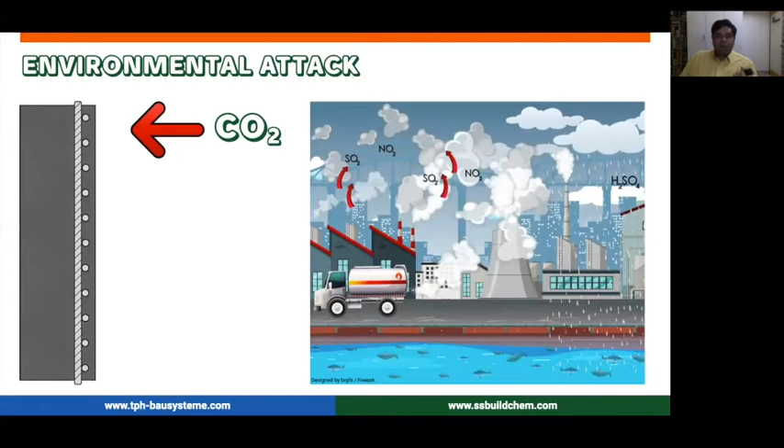So why does this happen? The chief cause of corrosion or deterioration basically comes from environmental attack. A lot of people talk about how the Taj Mahal was built so many years ago, or the Pantheon in Rome thousands of years ago, and they still stand - so why not new buildings? I'd say that since the industrial age, pollution has gone up drastically - carbon dioxide, carbon monoxide, water, SOx, NOx, so many gases from industries and vehicular pollution.

So all this pollution is directly trying to attack any new structure that we build. Yes, those older structures lasted a very long time, from when they were built to now. But now, as the industrial age progresses, there are problems relating to the durability of these structures as well.

Now, in a nutshell, if we think about what causes the deterioration, we'd find it easily. This is your concrete, and these are the capillaries or ingress paths for a lot of materials. It is basically carbon dioxide, chlorides, and water that will primarily cause the deterioration of your RCC structure as a whole.

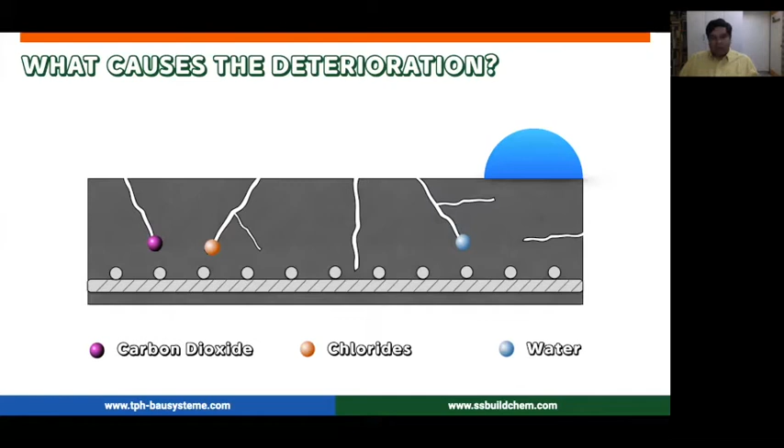These materials get access to your reinforcement through the cover. In case your cover is damaged or not functioning properly, these things go down. What they essentially do is change the pH of your concrete - it goes from a very alkaline pH to almost an acidic pH. That's basically what starts off the problems of deterioration in concrete.

Of course, I'm not going much into the depths of this - a lot of you are already experts in the line of waterproofing, as well as many consultants joining us today who also know and work a lot in this field. So I'm not going into the nitty gritty science of these things.

If you look at it in a very simplistic manner, the key to preventing corrosion is simply to isolate your reinforcement. Either by improvement of the cover region, or by repairing, rehabilitating, or providing protection to the concrete in the cover zone, we need to isolate the reinforcement from chloride, from other gases like carbon dioxide, SOx, NOx, and water. Once these three elements are kept away from your reinforcement, the process of corrosion simply stops.

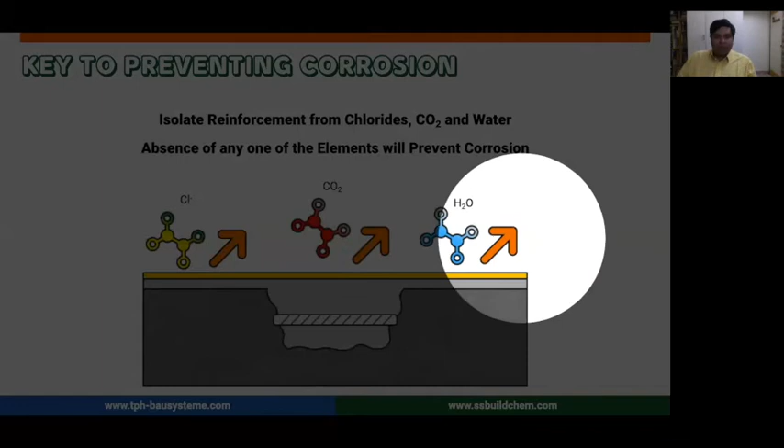So that means even if you're thinking about protective coatings, if you do it right at the beginning of the life of the structure, we can actually see that it increases the life of the structure quite tremendously and increases the durability for the times to come.

If you put a very simplistic view on the causes of RCC deterioration, you can see that they can happen either before, during construction, or after construction. So before or during construction, it may be due to design errors, like joint spacings not calculated, or load calculations not done properly.

But this rarely happens. More so, the causes of deterioration originate in mix design errors or poor workmanship - things like poor aggregate grading, using very high water cement ratios. We talked a lot about that in a waterproofing webinar as well.

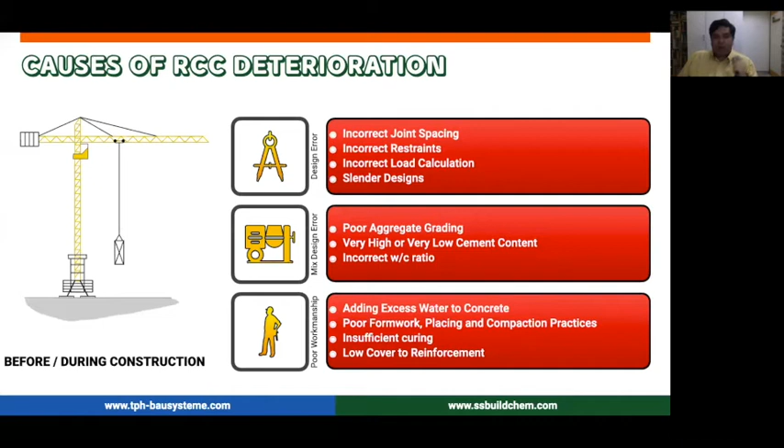And the second part comes, and this is where it needs much more improvement - that would be poor workmanship. That means adding excess water to concrete, not compacting it properly, not curing it properly, not working properly on the reinforcement zones or cover zones. That is where the problem of deterioration actually begins.

And also, if you have done all the first part correctly, then comes the problem about in-service issues - problems like static or dynamic overloading. That means there is a mechanical stress on your structure, overloading, lot more dead weights, maybe something like a collision, explosion, things like that.

Thermal variations are the primary way of causing cracks, and cracks are both the beginning as well as indication of a deterioration process. So everything starts off from a crack.

Then there might also be excess chemical loads onto your structure, which can be gases like COx, NOx, it can be water, then acid, salt, alkalis - especially underground structures are exposed to a wide variety of these kinds of aggressive chemical materials.

And also, last but not least, are biological factors that cause deterioration. Simple things like growth of fungus on your concrete, plants in your structure - they are both indications as well as causes of the structure starting to go bad.

So what can you do in cases like this? Once you say okay, we have started to have a problem, the first thing that you can do in the repair - even when you're evaluating a structure - the first step is do nothing. There might be something that you can do, you cannot do, but that is one option that you have, that you do nothing.

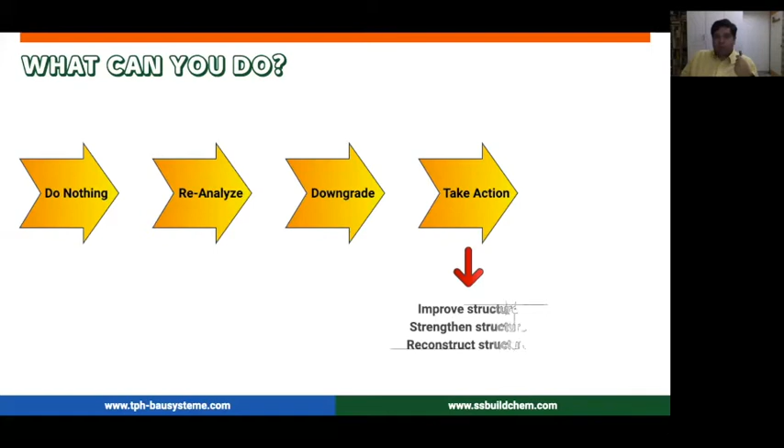Then the next part comes, which is important. So you have decided that something you can do is take some action. Some action means you can either improve the structure - that's where your repair and rehabilitation comes through - or strengthen the structure, that's where your retrofitting comes through, I would say. And the third option is you can reconstruct parts of the structure, or repurpose parts of the structure.

And the last, if there is no option available, maybe it's not financially viable to take up this particular point, then you have to think about demolishing the structure as a whole.

So in most cases, the logical step of action would be that concrete needs to be repaired. And here we have to understand both what is causing it, and the materials are key. So anytime you are taking up a rehabilitation or repair project, you have to take care of three things simultaneously - it's not one or the other, it has to be taken simultaneously.

Things like concrete condition - what are the defects, damage, what's causing it, the deterioration part of it. Then what are the aspects of the structure itself - what is the end use going to be? What are you planning to do with it after your repairs and rehabilitation? Are there any constraints to using it?

Everything relating to the structure is the second part, and the last part is the repair program. That includes what methods you require, what repair action plan you follow, what specification you follow, and what kind of planning and materials are involved. Once you bring in all these points, that constitutes your repair program in general.

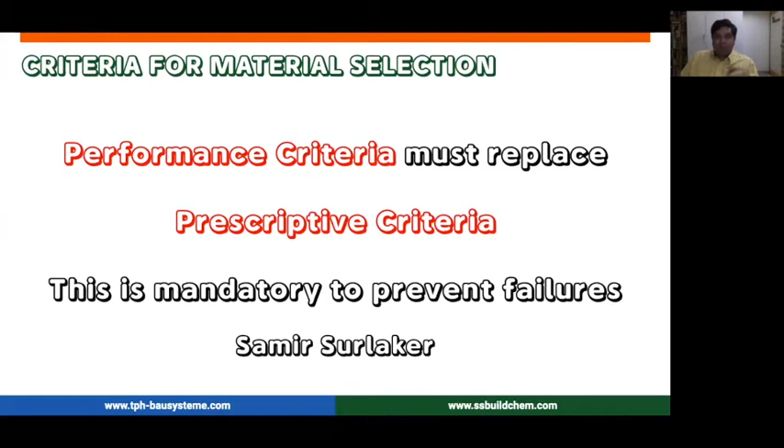That might be one method, but I don't think that's the right approach for each and every step of repair. Somewhere the performance criteria has to start getting into this. This is another area where our consultant friends really have to come together to guide and drive the repair process - in terms of diagnosis and testing.

Many of you are in the field of executing repairs, and others are consultants working in specifying and designing the repair system. To both parties, I'd say anytime a repair system comes to you, the first and most important part is diagnosis, and this diagnosis can only come through proper testing.

It's like going to a doctor. You go to a doctor, and the first thing he asks you to do is get some tests, and based on those tests he makes a diagnosis.

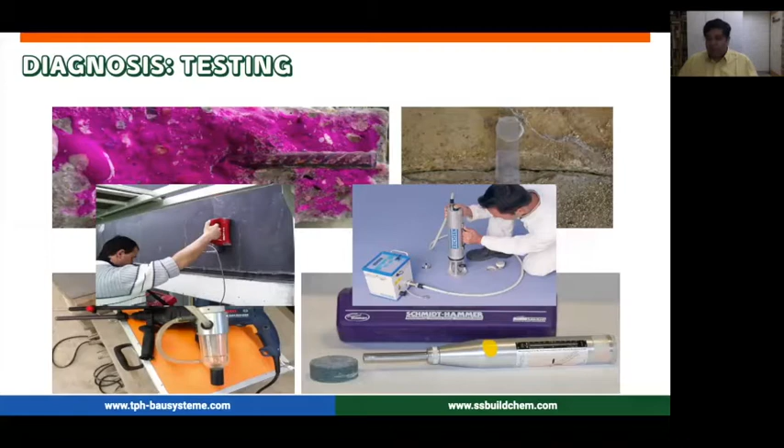So even basic things like a phenolphthalein test, crack movement monitoring, or a pull-off test for strength. The one on the left corner is for getting small samples to test the chloride profile and chemical makeup of the concrete. Then you have non-destructive testing based on impact echo, or UPV, and a Schmidt's hammer that tells you whether the surface is good or not. This kind of testing is very important in the whole diagnosis process.

Another important step in testing is observing reinforcement corrosion - this tells you a lot about whether your problem is structural or non-structural. For example, many times if you see generalized corrosion in your steel, most probably it is because of carbonation, and you'll generally see rusting around all sides of the reinforcement.

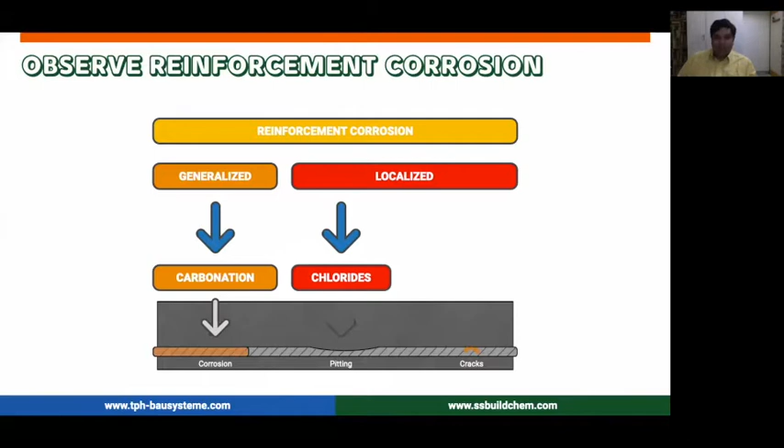If it is localized corrosion, that's much more dangerous, because it might be due to chlorides, which cause severe pitting and loss in the rebar section. It can also occur if a concrete structure is constantly under stress or creep - in that case you sometimes get stress corrosion in the steel, and begin to see small cracks in the reinforcement. So this kind of observation tells you a lot about what's actually happening to your structure.

You have to take a look and establish the cause of damage, whether it is structural or non-structural in nature. If it is structural, that means it is related to excess loads - maybe chemical loading, mechanical loading, or thermal loading. Non-structural simply means it is due to durability-based aspects.

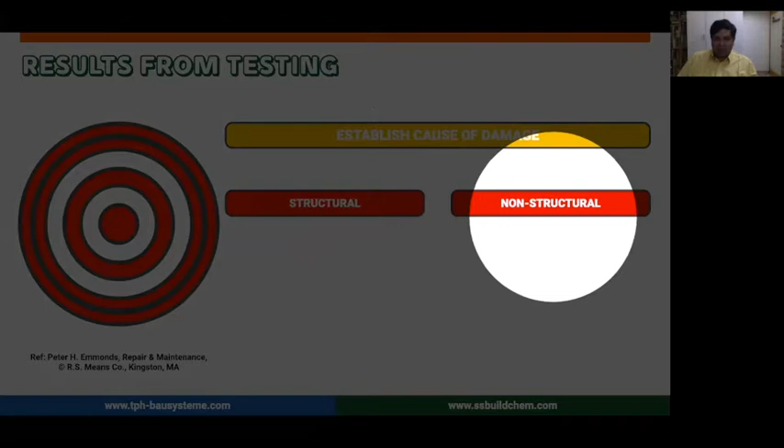The non-structural causes are much easier to repair, because in most cases you just do a basic repair as well as put a protective coat on top of it that will solve your problem.

Structural ones are slightly more tricky, because you need a structural engineer to actually understand the load redistribution across your structure, and then he can tell you where, in which elements, what kind of repair is to be done—whether jacketing is needed, whether an injection system would do, whether concrete replacement will do, or whether you need CFRP for retrofitting and so on.

So basically it is the cause that will determine the methodology of your repairs. Although the principles of repair are pretty finite—almost common for both structural and non-structural—and the kind of methods and materials you would use also remain more or less common, that is not the problem. Finding and treating the cause is the most important part, the most important way of repairing a structure for proper durability.

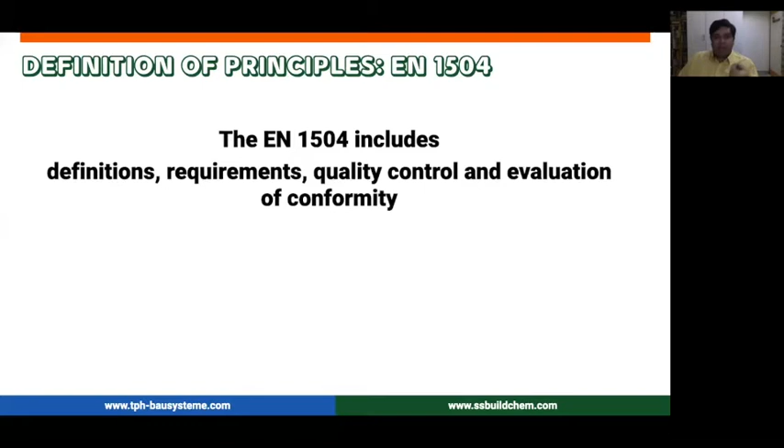So that is where one of these codes come in. This particular code is EN 1504. This is one of, I would say, the world's first proper coded provisions, and it includes a definition, requirements, quality control, and evaluation of conformity for repair systems. Basically, it regulates the products and systems for the protection and repair of any types of RCC structures.

This standard talks much less about what type of structure you're going for, but talks about concrete or RCC as a whole, and gives you certain principles to repair those particular RCC structures. So the information is very useful as a summary manual for planners, applicators, manufacturers, official bodies, test institutes, and so on—it's kind of a good specification guide for them.

When we talk about the principles of repair, EN 1504 actually breaks it into two broad areas. The first one is concrete defect remediation, meaning these six principles are targeted only to remedy concrete defects.

So basically, to repair this, you can look at protecting the concrete structure against ingress of substances and ingress of moisture. Then the third principle is concrete replacement or restoration. Then there is structural strengthening, then improving the physical resistance to damage, and improving the chemical resistance to damage.

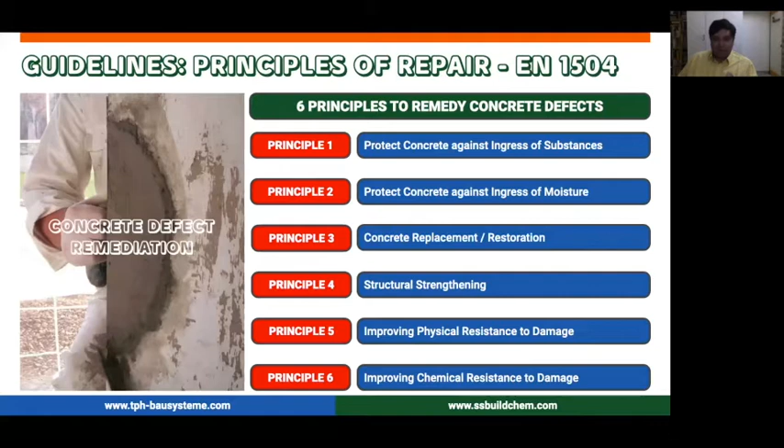If you actually see the methodologies involved, they are more or less similar to what we already do for repair—it can be something as simple as putting impregnation or protective coatings on top, applying mortar by hand, recasting with concrete, recasting with micro concrete, or replacing the element.

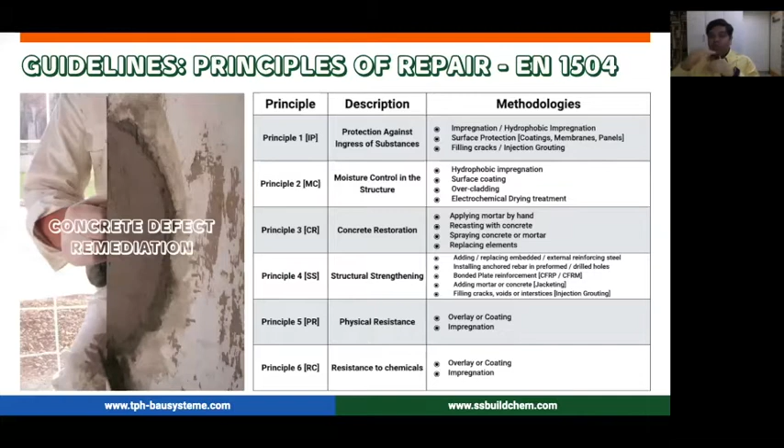Then under structural strengthening, you have CFRP, CFRM, installing anchor bars, adding or replacing reinforcing steel, and most importantly, filling cracks and voids through injection grouting. All these things we already kind of use for repair strategies, and what EN 1504 does is simply formalize the relation—under what condition you will use what kind of methodology.

The second part that EN 1504 gets into is preventing reinforcement corrosion. Here there are five different principles. The first one is restoring the passivity of the reinforcement. The first two principles, seven and eight, are based more on just providing protective coatings.

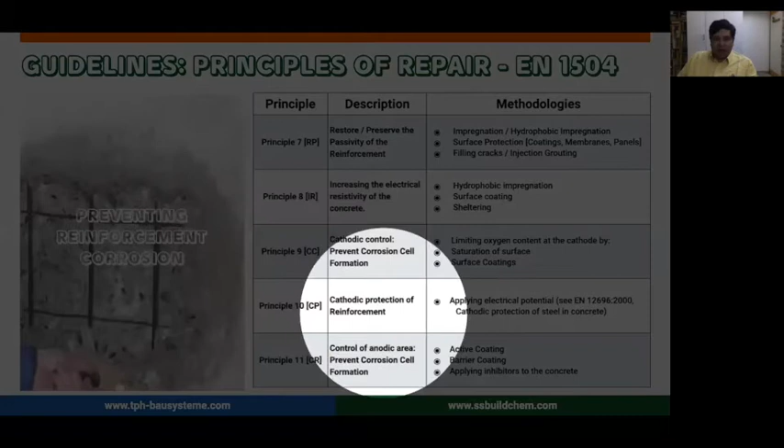Even cathodic control is pretty much similar. Principle 10, cathodic protection, is much more about application of electrochemical methods like electrochemical extraction, salt removal, and applying electric potential. Then controlling anodic areas is again done by coating the reinforcement itself—active coatings or barrier coatings for reinforcement—or using corrosion inhibitors in concrete.

So you would actually see that the materials and techniques we use have been around for quite some time—it's only that there has to be a formal way to decide what to do when. That is why we say repair is an art if you know the science behind it. The materials remain the same, the methodologies remain the same, but the art form comes in judging what methodology will remedy what kind of cause, and what kind of effect it's going to have in the future.

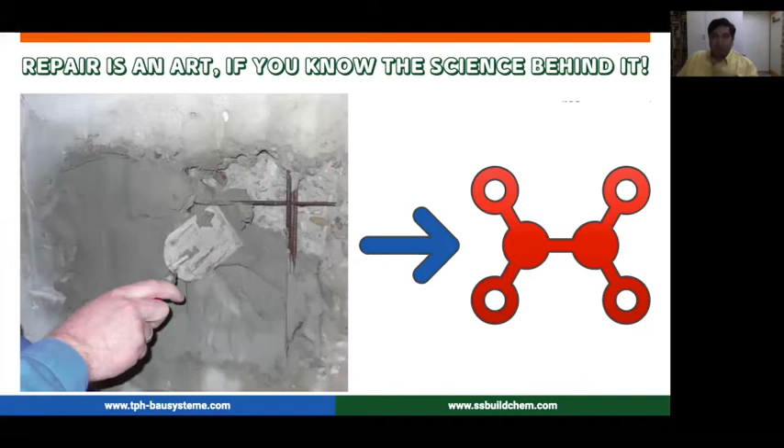So the general sequence of repair remains more or less the same. You start off with the first step, that is diagnosis—you basically figure out what the problem actually is.

So following that, you get to surface preparation so that your substrate can receive the repair materials pretty well. You have your corrosion removal, followed by your corrosion protection. Then you have application of your bond coats.

Replacing your concrete, basically a concrete replacement system. This might be your mortars or micro concretes or whatever things along those lines. Then you have a concrete cosmetic fairing coat, just to give an even surface for your protective coating systems.

And last but not least, once the repair is done, you have to protect your structure, because if you do all the very difficult steps of repair and leave your structure unprotected, then your repair cycle is just going to repeat, maybe within the coming year. So a failure of repairs becomes a big problem, and it can only be remedied by protecting our structure properly.

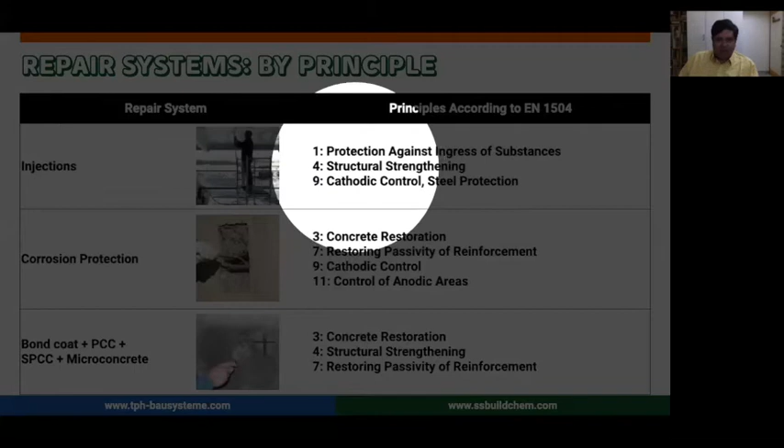So now again, if you take all those different steps that we just saw, what it would be coming into is mostly our injection systems, which can protect against both ingress of substances as well as structural strengthening. Then after the surface preparation comes your corrosion protection systems, which also meets a lot of principles according to EN 1504.

Then comes your step on bond coat, PCC, that's spray polymer modified mortars, micro concretes, and so on. And followed last but not least by impregnations and coating. We'll also talk very briefly about strengthening methods, that is CFRP and FRCM.

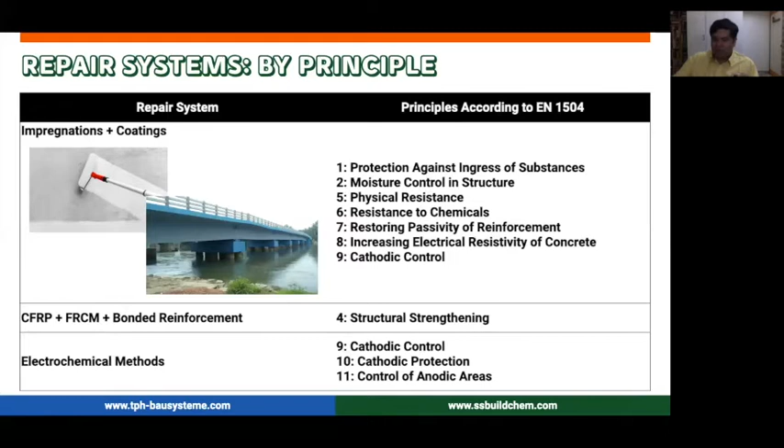These are some new technologies; CFRP has been used for quite some time. FRCM is a technology that is coming up for different kinds of structures. We'll just take a quick look into that as well.

So if we start off with the first part, once we see that there's a problem, the crack basically forms the beginning of the problem. So it's both an indication as well as a sign that something has gone wrong.

So now cracks, you can see many different types throughout your design. You can have longitudinal cracks, cracks due to frost damage, freeze-thaw, shear cracks, maybe incorrect joints done, or simple surface crazing due to shrinkage. There are a lot of things.

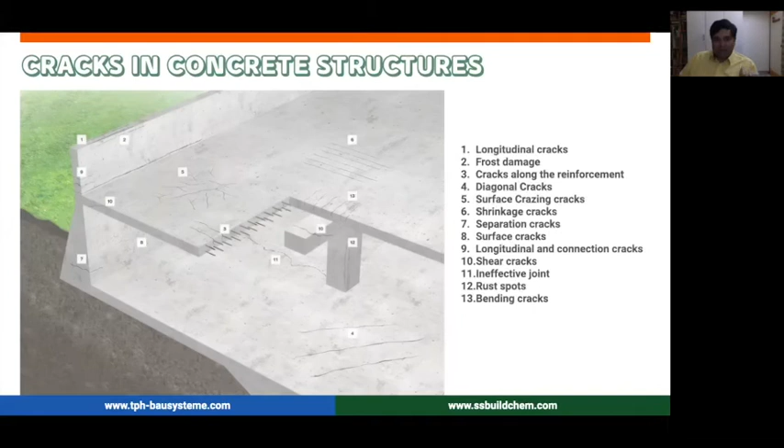So the thing about cracks is some of them can be structural in nature, and some of them can be related to the durability of the structure. So it is up to us to find out the cause, what is causing the cracks. Of course, they can be remedied by pretty much the same kind of injection materials.

So once we talk about the different material types, you have epoxies, you've got polyurethanes, you've got cements, you've got microfine cements. Then today you've got acrylic gels and also PUR foams. But if you see all the things on the right hand side of the diagram, that means the microfine cement suspension, cement slurry, polyurethanes, and epoxies.

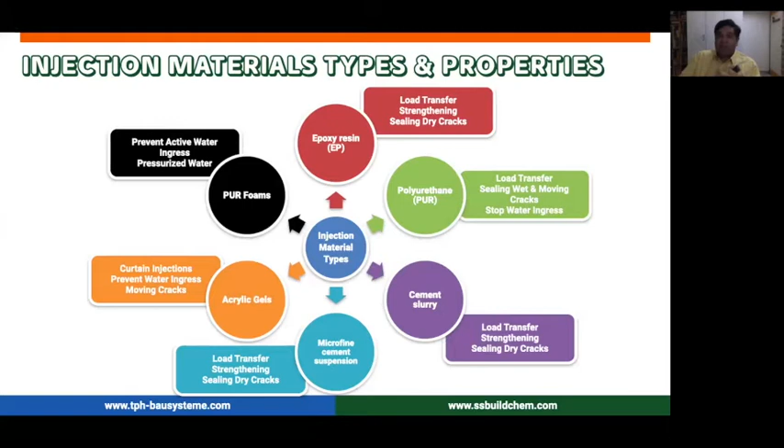And these are the ones that are normally tougher, meaning they have a very high tensile strength, a very high compressive strength, and extremely high bonding strength. So these are the ones that are mostly used in your repair methodologies, as opposed to the other two types of injection systems.

And the selection of the injection material depends pretty much on your crack width. For example, if your crack width is maybe 0 to about 0.1, 0.2, 0.3 mm, then the only thing that can go inside would be a low viscosity EP or a PU or an acrylic gel. In this kind of case, you can't go in with cement.

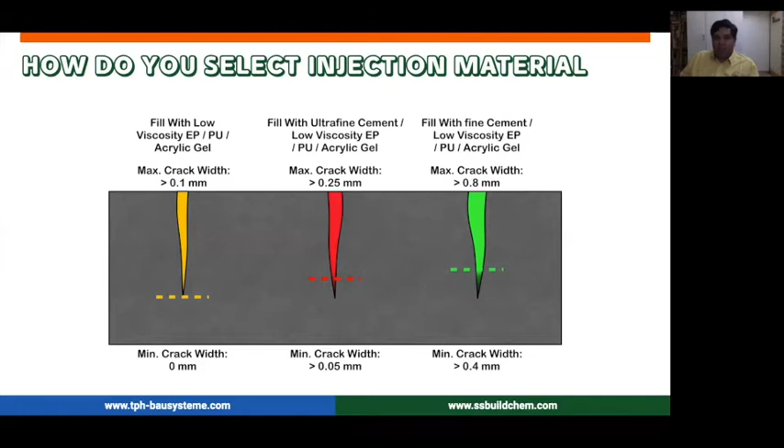If your crack widths are maybe somewhere around 0.25, then you can start thinking about ultrafine cements. But only if your crack widths are more than say 0.8, 0.9, in that case you can start looking at cement grouting as an option.

So now, the injection material selection is based on a variety of factors, like whether it's a surface crack or a deep crack. But when we talk about repair and rehabilitation, what we're looking to do is transfer loads, meaning you have your crack face and you want to transfer the load from one face of the crack to the other side. In that case, the best two options would be a hydraulic or cement injection system, or an epoxy injection system.

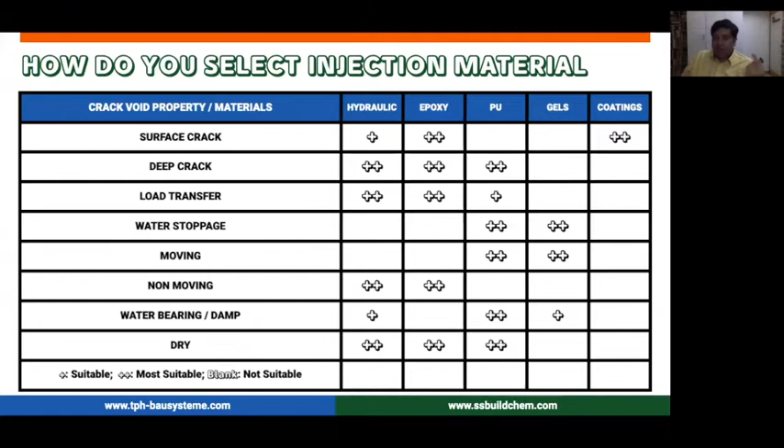There are today certain PUs also available with us, which we call structural PUs. They also reach compressive strengths of almost 70. So in case your voids are a little bit wet or damp, the basic epoxy or cement can't run. But if it's a bit wet, you can also use those kind of structural PUs to seal those kind of cracks.

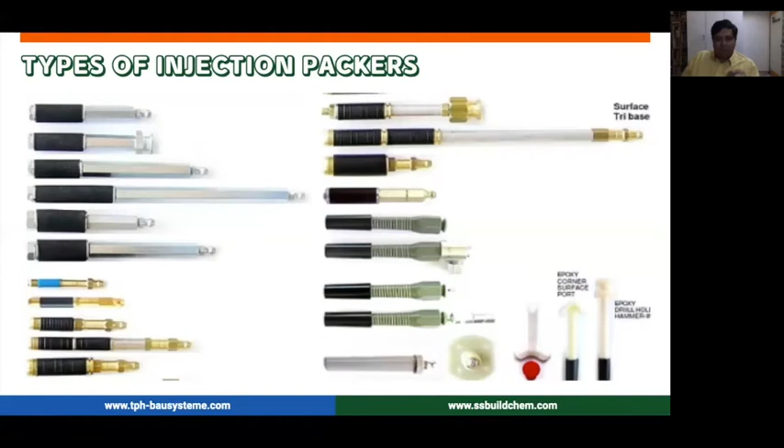Like if you're talking mostly crack remediation, then mostly we are using these kind of steel packers along with surface packers if the cracks are very close to the surface. But I would say talk more to us on how to select it.

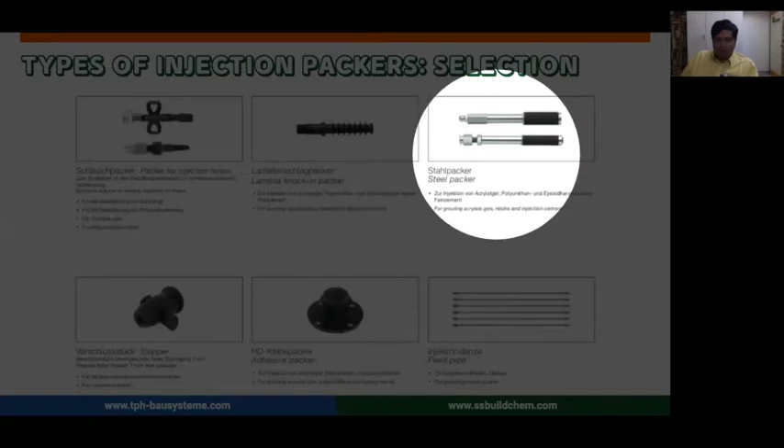For example, if you're looking only at cement injection, we can use something like this, which we call hammer packers, or you simply just knock in these packers. Then these are the steel packers that I was talking about. These are most commonly used. And if your cracks are along the surface and not going very deep, then you can use a simple adhesive packer like this. So modern materials, modern machinery, and modern accessories are what you need to do your job in the right way.

Now this is another parameter which you have to understand very well. For example, we can think about repairing two kinds of structures, that is masonry structures or concrete structures. We can say the average masonry has got a strength of only about 8 to 10 MPa, somewhere thereabouts. We can say that average concrete is somewhere around 40-45 MPa. So in this case, any kind of injection system that we are selecting has to also fit into these kind of values.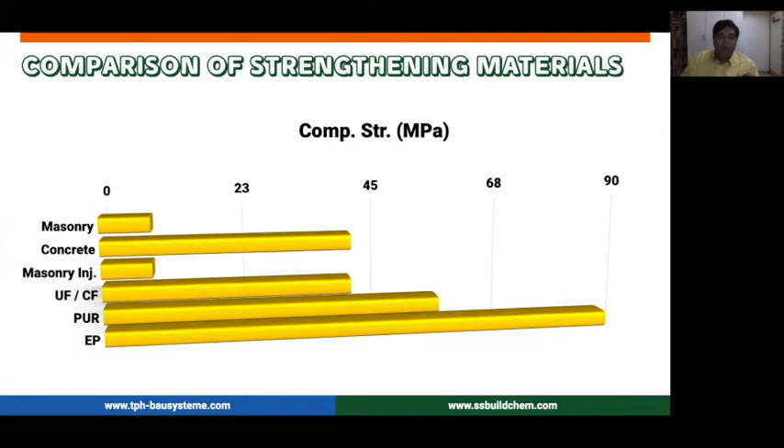Which is why for concrete, more you can use both the cement based materials and the PU or epoxy materials, because they really allow the transfer of load across the cracks. But if you are trying to treat a masonry structure, then it is better to use a very low strength material for that.

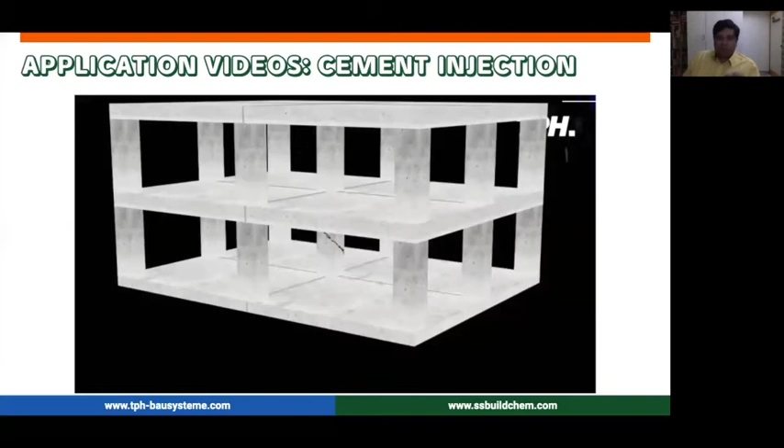Just a couple of quick videos for you to have a look as to how we do the microfine cement injection, and the one that follows will also be on both the epoxy system as well as the PU system.

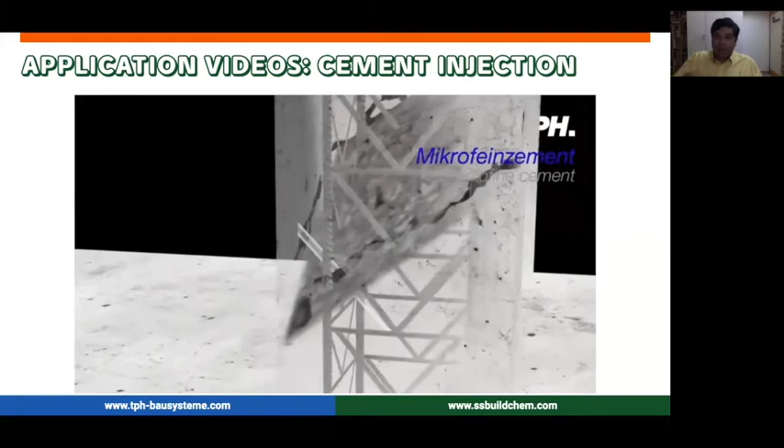Normally, anytime you have cracks or even voids inside your structure, that kind of void basically starts creating problems in the load distribution in your element. In that case, you have to make drill holes along the crack face, making sure you're intersecting the crack. You normally cover up the crack face - I mean, just for the graphic representation here, they're not covering up the crack face.

And then you pump in your material. Now this material should be capable of filling in those voids pretty easily, which is why that graphic that I showed you was about how to select the materials. So your material selection depends on your crack width.

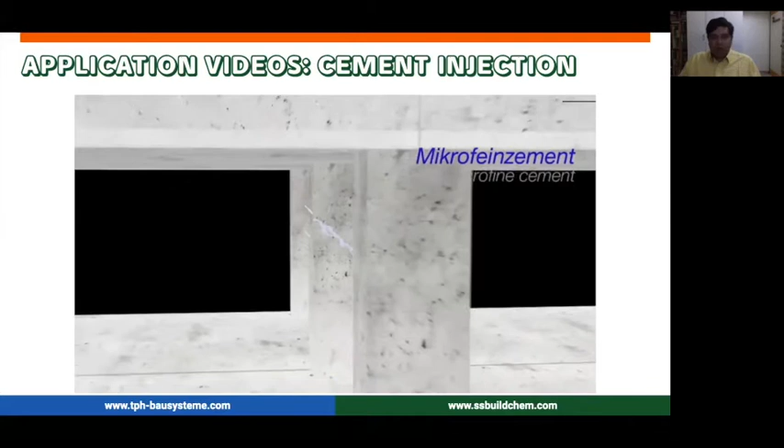Okay, so based on that, again, cement and RCC, they are the most compatible materials. You can pretty much use it for most typical RCC structures where you don't need very high strengths to be transferred. So this is one option of doing it.

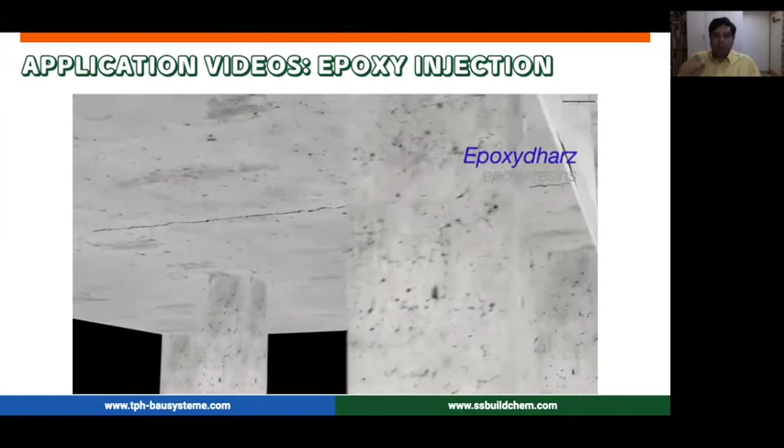For most times, what would be useful - because the load transfer across the cracks needs to be higher, and maybe if the crack size is really small - then for 9 cases out of 10, what would solve your problem would be a low viscosity epoxy injection. This would help you to both fill in the voids, create a homogeneous RCC in that place, and then enable smooth load transfer across your crack face.

So the procedure more or less remains similar. You just drill across your element and intersect the crack, clean it out, attach your packers, and then continue with the injection system.

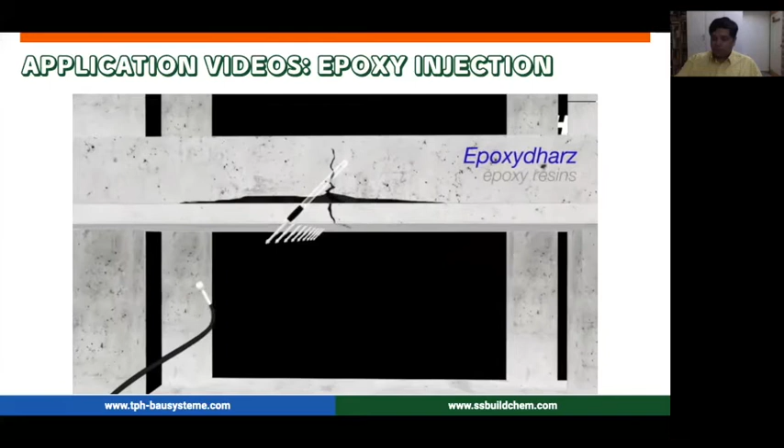That's it, so the process remains very basic. Of course, we can help you out with different kinds of drawings and method statements as and when needed, and the same goes for PU injections as well. I'll skip through that pretty fast.

Crack injection is also seen as one form of strengthening because it improves load distribution across your element, so your elements are able to carry the same amount of load they were initially designed for. Another form of strengthening, again based on EN1504, is using CFRP as reinforcement.

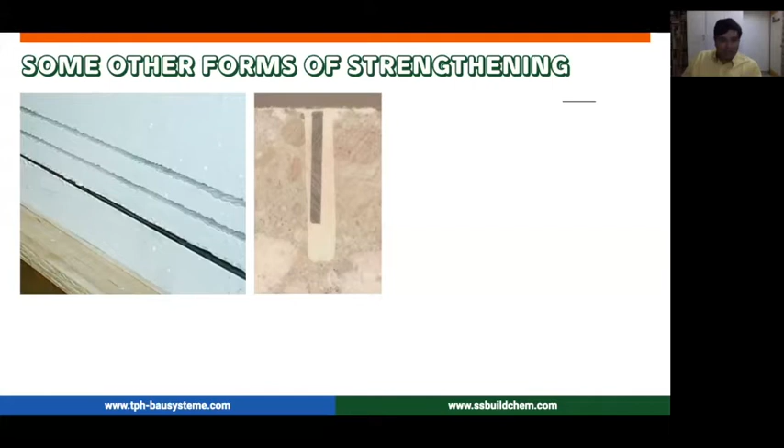You can have a system where you put the CFRP plate into a slot - you cut slots into your element, put the plate in, and fill it with epoxy mortar. You've also seen CFRP wrapping, or carbon fiber wrapping. I'm not getting much into these technologies because it's too big a topic to include in our overview.

In case of certain buildings, like inside buildings where fire might be a problem, or heritage structures, you can't use epoxy. In that case, we come to the fiber reinforced cementitious matrix.

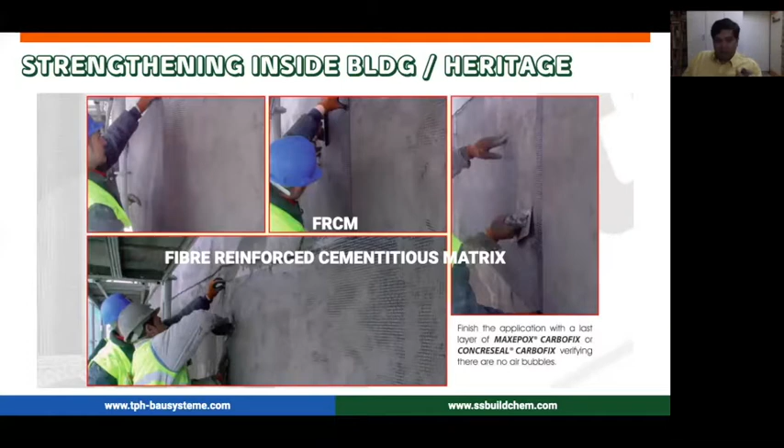What happens here is it's the same carbon fiber mesh, but rather than being encased in epoxy, it's encased in a tough but flexible cementitious mortar. That opens up a lot more application ideas, especially where fire resistance is involved. It gives you the same strengthening as CFRP, but is much easier to handle and apply.

So again, taking a look through our list of repair procedures - the first one is surface preparation. Of course a lot of different methods are available: basic chiseling, shot blasting, using needle guns, using a good grinder. Oftentimes we forget the importance of using a grinder for surface preparation work.

But one of the best methods is high pressure water blasting. That allows us to remove the top laitance and other problems without doing much damage to the structure below - it doesn't open up micro cracks. All the other methods are a bit more harsh and might open micro cracks into the substrate, which could create problems later. So high pressure water jetting remains the best way of preparing your concrete or steel.

Now, for the degree of preparation, there are certain guidelines given by ICRI. Based on the type of treatment we want to do - whether concrete overlays, polymer overlays, or self-leveling toppings - it describes a CSP, a concrete surface profile. CSP1 is a smooth finish, and CSP10 is a rough finish surface. This is one of the documents you can search online, and it's a good guideline as to what degree you should prepare your substrate.

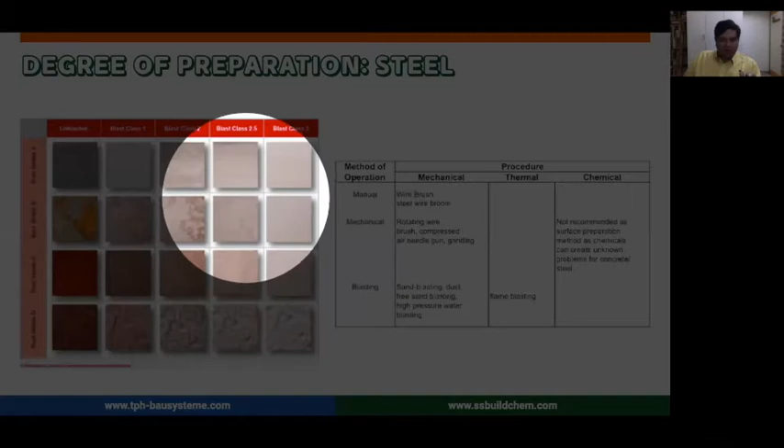The same goes for steel. In most cases, coatings will say you clean the steel to class 2.5, which is a really clean finish by removing all the rust.

Even EN1504 makes a pretty clear recommendation that chemical ways of removing rust, meaning rust removers, are not recommended because they can create problems. Any rust remover, even if pH neutral, is acidic in nature, and at later stages this might affect your concrete or repair performance. So rust removal should be primarily by mechanical means - that's what works best.

Once we have the substrate prepared, we go to the next step, corrosion protection. When we talk of corrosion protection, the easiest thing we can do is use an active coating for the reinforcement.

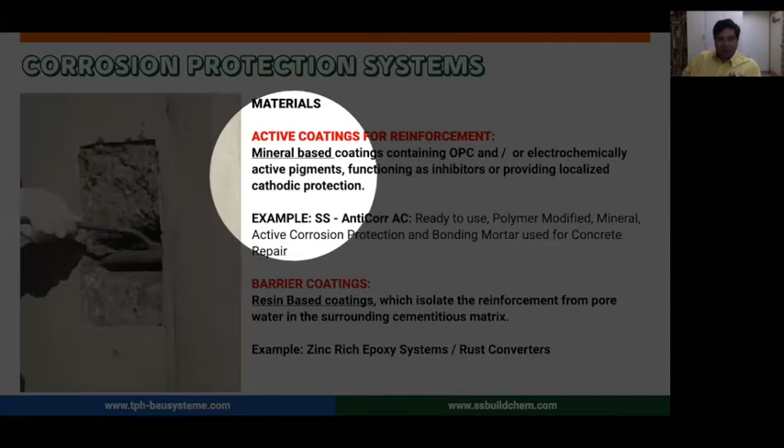So these are mostly mineral-based materials. They contain OPC and other electrochemically active pigments, and these pigments and ingredients act as inhibitors, providing localized cathodic protection. So it looks like this - you just mix a powder with water and apply it onto your prepared steel substrate.

For example, the product that we have is called SS AntiCorr AC. It's very easy to use. Can be used in almost, I would say, 9 times out of 10 for all your concrete repair strategies.

The next one is your barrier coating. So these are basically resin-based coatings like zinc-rich epoxy systems. I would say use them a little bit carefully, because then there is always a problem of subsequent bond, and you don't really need one unless you're looking at, say, maybe marine repair or very quick repairs or something like that. So use it a bit sparingly is my recommendation.

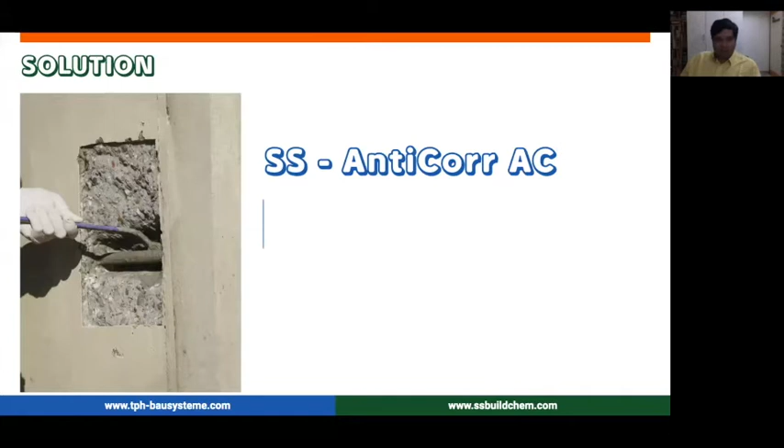So once you do your substrate preparation, you do your corrosion protection, then you look at the bond coat. Bond coat is nothing, it's simply just making a bridge between your existing substrate and your mortar to be applied. So in our case, the same material, the SS AntiCorr AC, that functions as a corrosion protection, the same thing also functions as a bond coat. So you can just mix up the same material, apply it onto your concrete substrate, and then apply the mortar fresh on fresh with that.

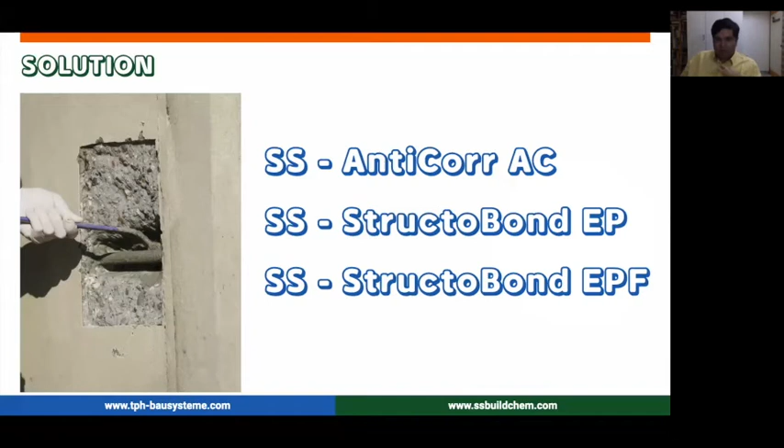In case epoxy is needed for, say, things like floors or somewhere a higher bond might be needed, we also do have other epoxy-based systems available for that. But again, the first thing, always keep for concrete repair - it's better to use cement-based materials. So cement to cement, the performance and the compatibility is much better.

Then comes your concrete replacement system. So these are basically what we call your polymer modified mortars. We recommend that you better use a ready to use mortar, because again, getting the sand, getting cement, and then using a polymer, mixing it on site, it becomes too much of a hassle to get together all these different things on site. So it is recommended to use pre-bagged polymer mortars.

You can now get it both as a trowel applied grade, and you can also get the same thing as a spray applied grade. So it's very easy - you simply have a mortar spraying machine. You can do large areas in a go.

So based on international standards on EN 1504, if you're looking at structural repair, then very simply what you need is a compressive strength more than 25 or more than 45. So this is category R3 or R4, and plus they also have some durability requirements. So they're very clear again what mortars can be used for what particular purposes.

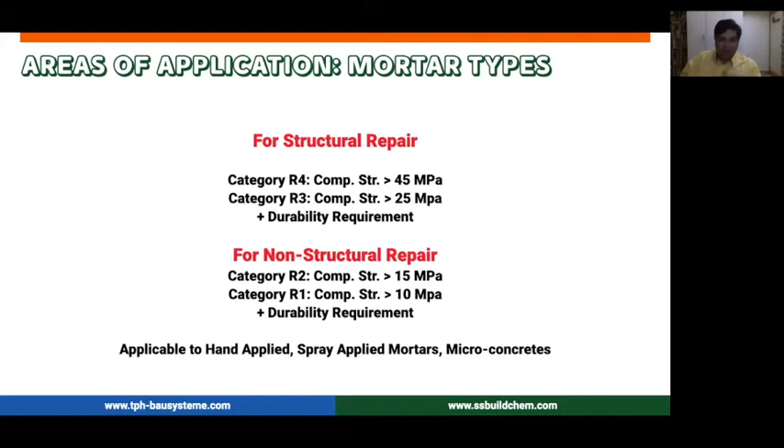So again, your mortar compressive strength should be matched very closely to your substrate. It should not be like if you have a substrate that's M30 or M35, then you're using a mortar which is like, say, M70 or M80. It's not required - it should be matched pretty closely to your basic substrate.

Micro concrete is another area which you can do. So even if you just do your corrosion protection, if you have a large fill material, just put on the form and then simply pour in your concrete. It's more or less like a pour and fill. That's it. So micro concretes, again, very simple to use, but they're governed by the same codal provisions as the first one.

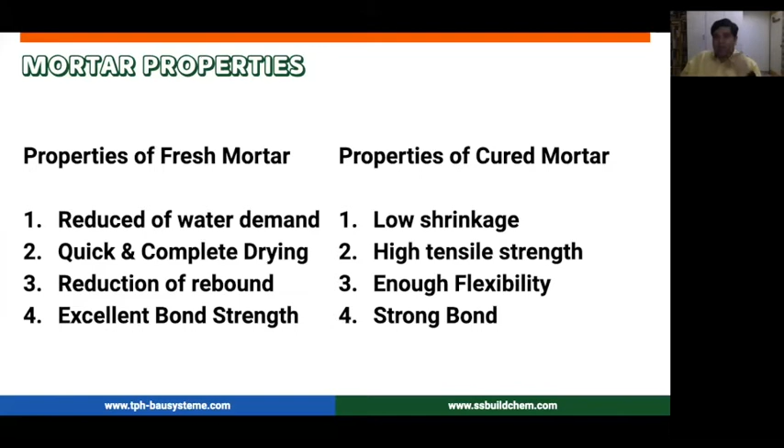So when we take a look at what do we need, basically our mortars should have low shrinkage, high tensile strength, enough flexibility, as well as strong bonds to the substrate. And also what you're looking for in fresh mortar is reduced water demand, then quick and complete drying, reduction of rebound if you're using spray mortars, and again good bond strengths. So that means you should be able to work with it very easily on the structure, and at the same time, it should give you the required mechanical protection as well.

Then you can have controlled shrinkage and expansion, thermal compatibility. So a lot more durability requirements can be built into your mortars, and the type of mortars that you select will then kind of depend on your end use.

Of course, curing is important, so ask us about which grade of mortar or what micro concrete is suitable for what particular purpose, and based on your particular site requirements, we can make the proper recommendations.

Another area that we have is heritage mortars. For old buildings, they don't really like use of cement because cement makes the whole structure very rigid. So what you basically need are OPC free mortars. These don't contain any cement, they're based on lime, and these kind of mortars can be troweled very easily. You can see they're very easy to work with.

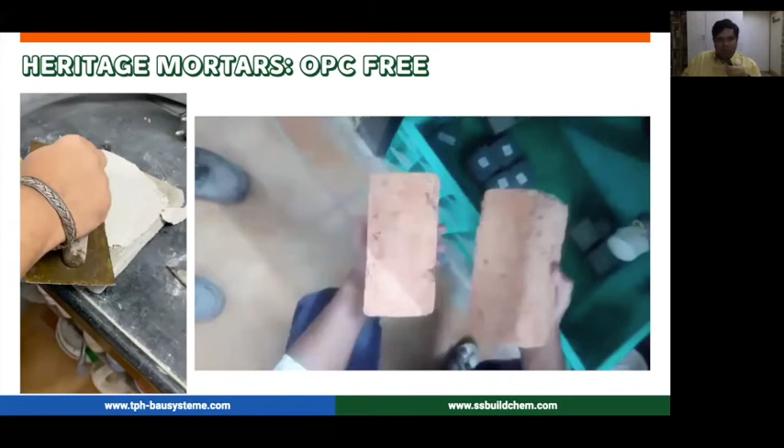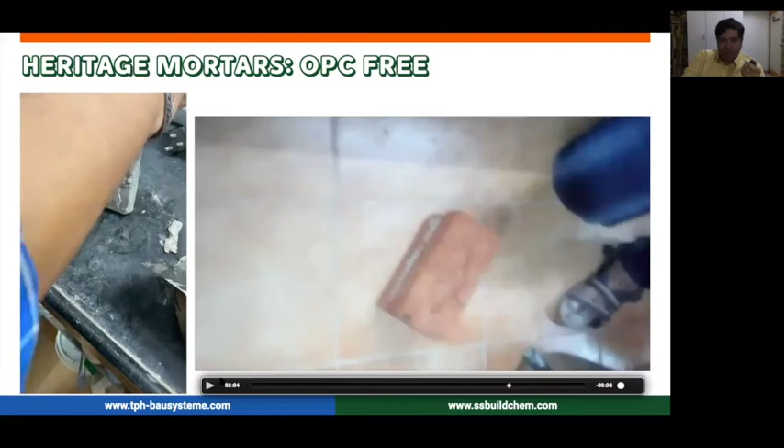You basically need them to match the properties of the old building. This is another demo showing the bond strength. This mortar was applied onto two bricks, and the bricks are simply put together, and you can see it's a very tacky kind of material. It will stick well, so you can use it for old pointing, old plaster, or restoration of broken pieces. It's an additional kind of mortar, but only for old structures.

You can see it's got very good bonding strength, so it will bond to pretty much any old substrate. Again, from our side, a lot of options are there. You've got your basic troweled mortar, your SP which stands for sprayable mortars, a high strength mortar, your free flow non-shrink micro concrete, and of course Historep, which is our heritage mortar.

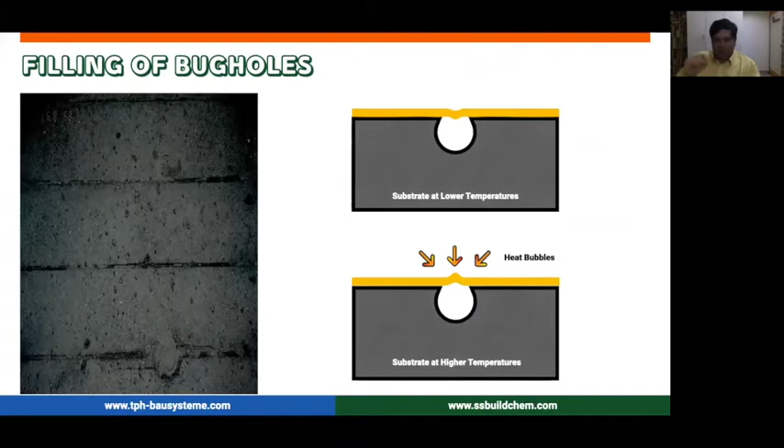After you do that, the next part is doing cosmetic repairs just to ensure you get a smooth substrate. In case your substrate has pinholes or similar problems, and you do the coating on top, whenever there is a lot of heat, the coating will tend to bubble. So filling of the bug holes is very important, and you need proper cosmetic repair for this.

In case there are surface imperfections, it won't work. So you need a trowelable mortar that works very easily, and you can fill all the pinholes so that you have an absolutely plain, smooth surface for your coating. This way your protective coating system will also perform better.

Now we get to the last segment of the presentation, that is protective coatings. Surface protection systems are one of the most important steps. You can do them on new structures as well, but they are definitely needed after a structure has undergone repair and rehabilitation.

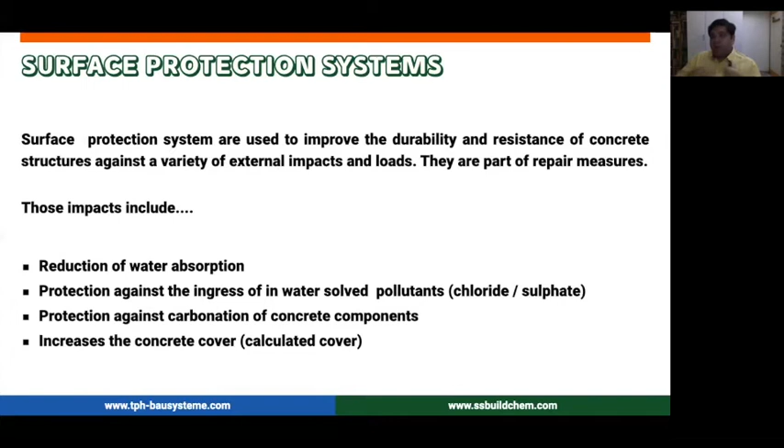What they basically do is reduce water absorption and protect against the ingress of waterborne pollutants like chlorides or sulfates. They increase the effective concrete cover, meaning in terms of durability, maybe 300 microns of a particular coating might be equivalent to almost 70 to 80 millimeters of concrete, or M30 concrete. So it gives a very high degree of protection.

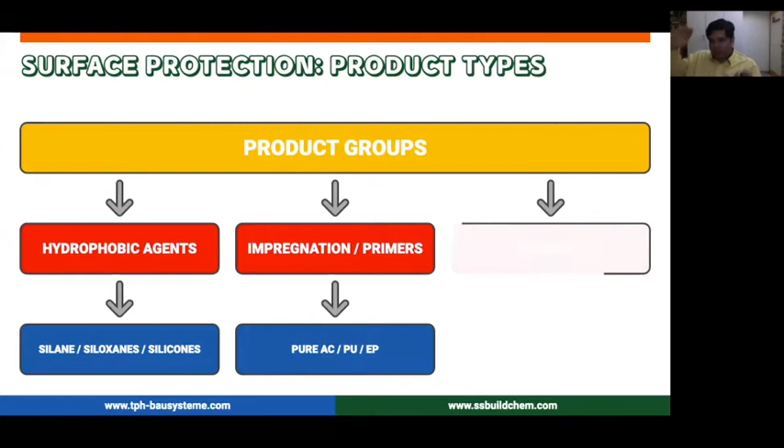Surface protection systems can be broken into different product groups. There are three basic product groups based on EN criteria. The first is hydrophobic agents, based on simple silane, siloxane, or silicone based polymers. You apply them and they go about 4 to 6 mm into your concrete substrate and hydrophobize it, which is why they're called hydrophobic agents.

Then you have impregnation primers, which leave a very thin film. They impregnate into the concrete but leave a thin film on the substrate, so they act mostly as primers. These are basically pure resins, meaning pure acrylics, pure PUs, pure epoxies, and they act as impregnation primers.

Finally, you have the coating systems, which can be based on cement, epoxies, polyurethanes, or acrylics, but they're all basically filled systems. That means pure resins along with fillers, so you get a coating that protects your structure in the long run.

Your basic silane siloxane system is a hydrophobic agent. As soon as you apply it, it comes down through the concrete, enters it, and protects it against the ingress of water. Very simple mechanism.

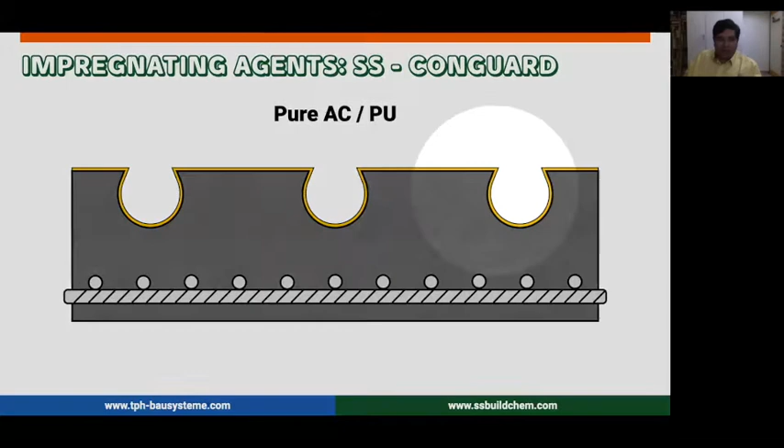Your impregnating agents or primers very simply leave a thin coating on top that covers all the surface discontinuities. On top of this, you can put any coating you choose. What a coating normally does is provide protection for your concrete, filling in all the surface imperfections and leaving an additional layer that acts as protection for the concrete system in general.

So surface protection is needed. You need optimum protection against aggressive media, and it has long-term benefits.

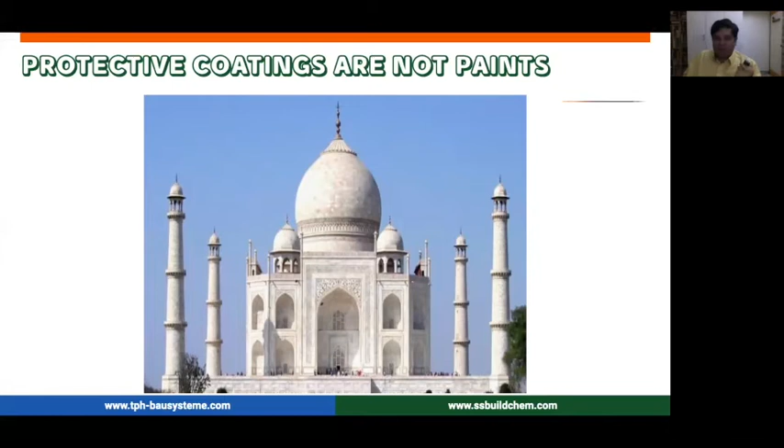A lot of times when we talk about things like anti-carbonation coatings or even polyurethanes, people feel that they are paints. But you have to understand that these kinds of coatings protect your structure against a lot of ingresses, and they are not basically paints.

A good protective coating will have all these different properties put into one: things like chloride and carbonation resistance, water vapor diffusion. It should be open to water vapor diffusion, but at the same time should be waterproof, meaning it should not let water inside - pretty much like your human skin. It should have crack bridging abilities, and if applied in the open, it should be resistant to UV and weathering.

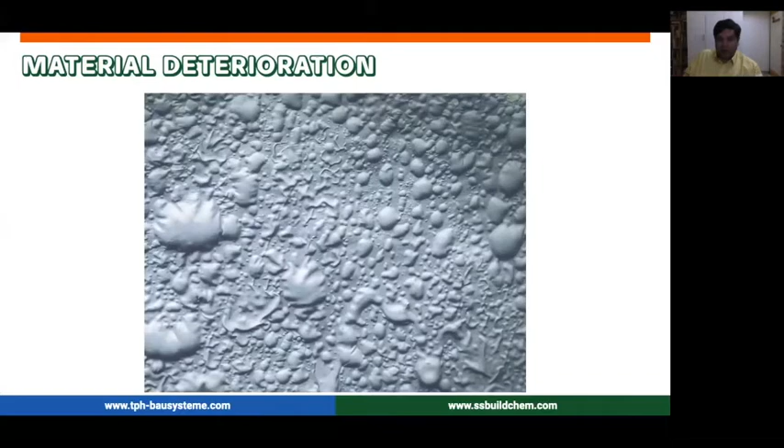A lot of times the problem comes in selecting the wrong material for the wrong application. For example, if you're looking at basements or underground systems, one can use things like polyurethanes. But once you're protecting external structures like external facades of buildings, bridges, tanks, any external vertical surfaces, what you would need is a breathable acrylic coating. Otherwise, you mostly see problems like osmotic issues coming in.

Talking about the requirements, one of the first things needed is chloride and carbonation resistance. This is tested by testing carbon dioxide as well as chloride diffusion through your concrete. There are limits to it based on IRC SP80, one of the few Indian codes on repairs. Of course it's for bridges, but can be used for quite a lot of different things.

It's also tested for salt spray. This will tell you, if you want to use the same coating in and around marine conditions, whether it can withstand those kinds of things. So salt spray test is also important.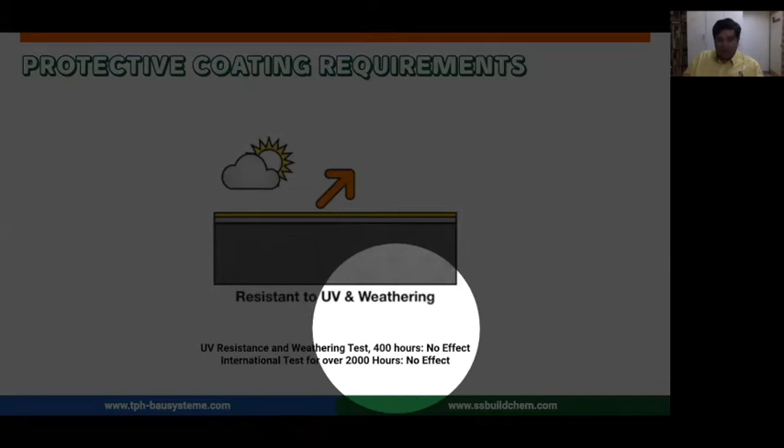The next requirement is that it should be resistant to UV and weathering. Normally this is tested by ASTM G53, where the coating is kept under UV light for about 400 hours up to almost 2000 hours, and then they see the effect on the coating.

Of course, your coating has to be resistant to water ingress, so it's tested for water permeability in accordance with EN 1062. That should be very, very low - less than 0.1. If not, your coating is going to let water go through.

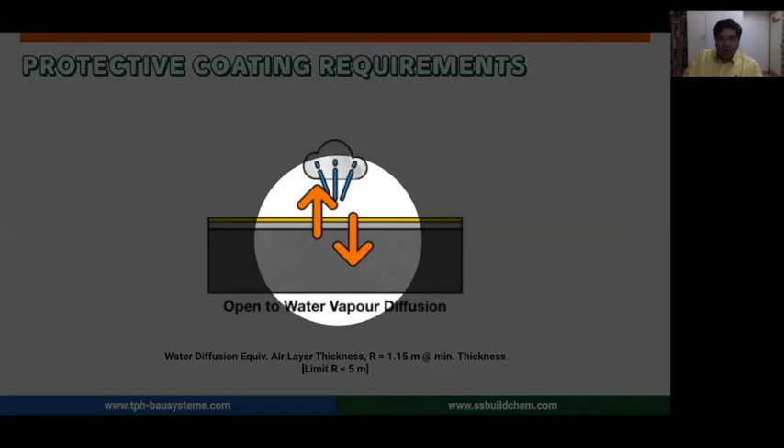The next one is a little bit opposite to what we saw before - the coating should be open to water vapor diffusion. That means it should allow water moisture from the inside to go outside, but it should not allow water from outside to come inside. This concept is called breathability.

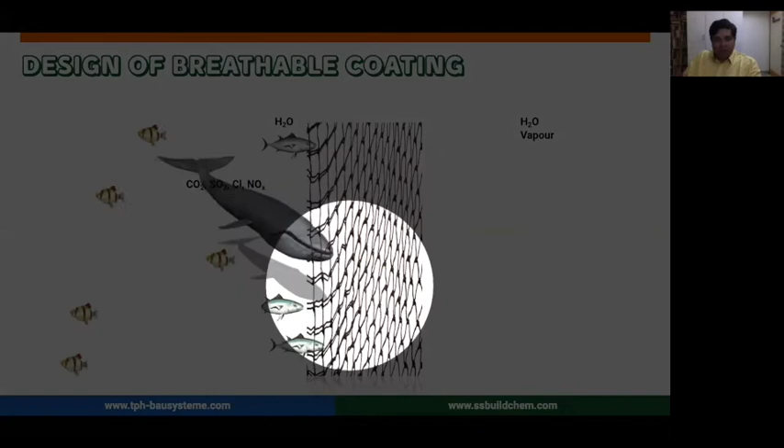Breathability and water repellency are part of the same coin. To put it simplistically, as I'm a Goan, I like fish - so the coatings are basically designed like a net. When we talk about water vapor, water vapor molecules are like small fishes, very small in size. But your basic water molecules, carbon dioxide, SO2, and chlorides are bigger molecules, so they cannot get through the net.

It's very simply that if we can design the opening size of this net properly, which we do with anti-carbonation coatings, then we get a pretty good breathable coating.

The next requirement is also, since this is used on a lot of dynamic structures like bridges or even tall buildings under wind loads, your structure has got some kind of movement, some kind of dynamics. So it does need a crack bridging ability, and that is what is also tested.

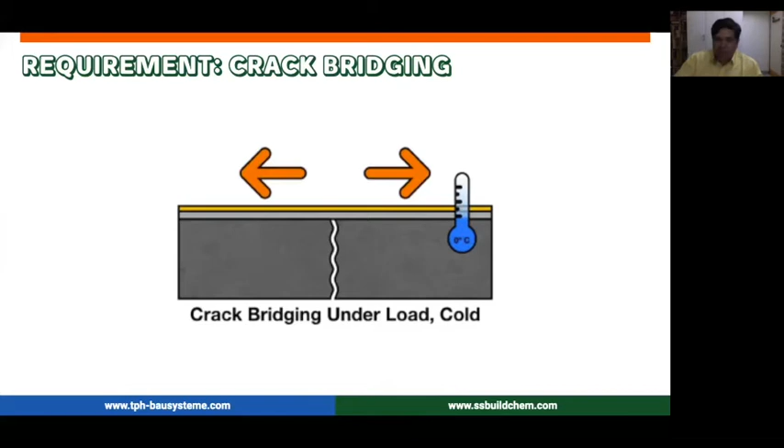One of the solutions we have here, which has been used for quite some time now, is called SS Protectocon AC. It kind of has all those 4-5 properties that we talk about for a good protection system.

I'll show you many examples of where this kind of thing has been used, for example for very different kinds of bridges and structures. This coating has been tested and approved in line with IRC SP 80, guidelines by the Indian Roads Congress, and also by the specification for roads and bridges by the Ministry of Road Transport and Highways. These are two of the guiding specifications that talk about anti-carbonation coating, and EN 1504, of course.

A material like Protectocon AC actually meets these kinds of requirements, with extensive testing done both at IIT and other locations. We can provide all these details when we talk more about it, but now it's much more to understand the concept as well.

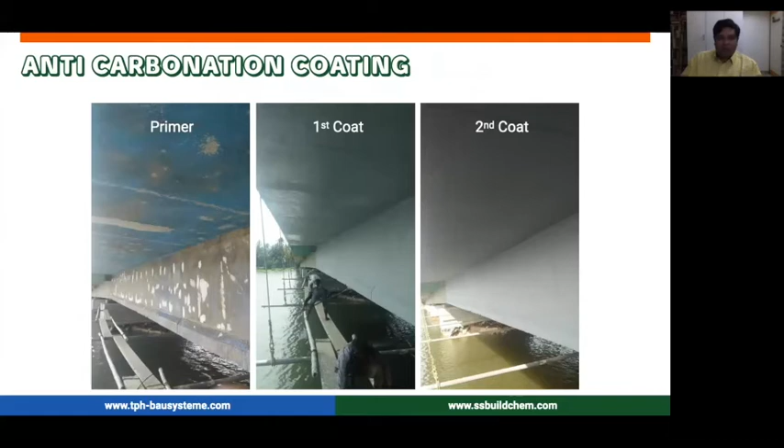This kind of material is pretty easy to use. That means it's simply a primer system, and then you apply it - the first coat and the second coat. So application can be pretty easy.

We should not take unsafe application techniques into consideration - we need to use proper safety equipment, proper spray material methods, proper scaffolding, and proper safety gear for the people who are spraying. Using these kinds of systems, the job can be done very nicely, very easily, and very quickly too.

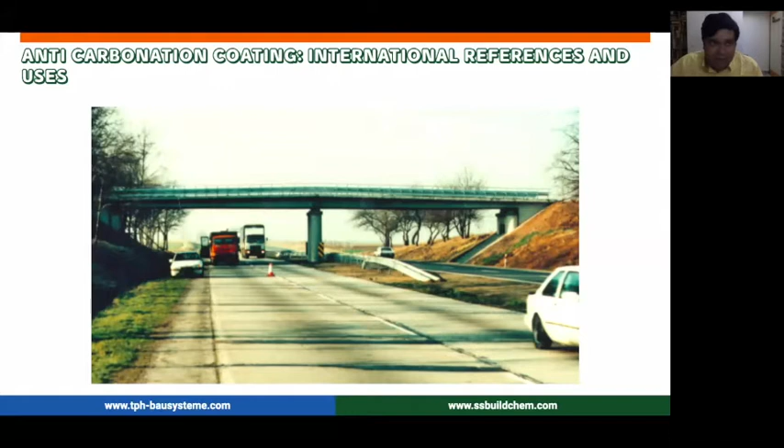The application for this kind of material is manifold. You can use it for structures like bridges, cooling towers and chimneys, concrete silos, and storage tanks. These are just some photos of different bridges.

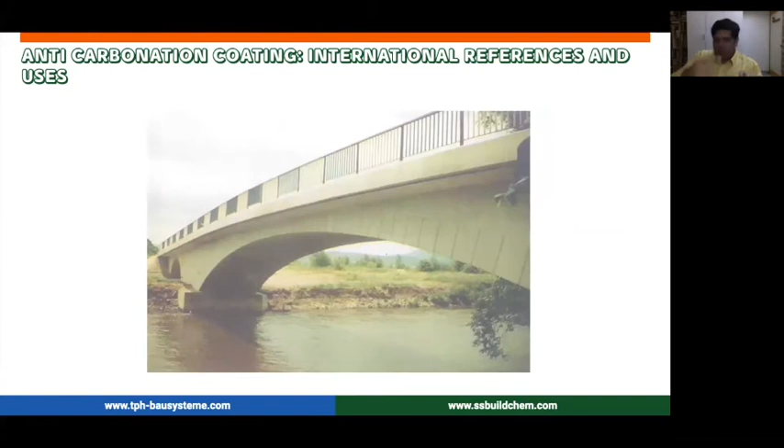Walkways, bridges in marine conditions, bridges across culverts and rivers, even different culvert structures - you can very easily do with this kind of material - viaducts, high structures, and even buildings.

So you first do the cosmetic repair with the fine mortar, giving it an even surface, filling in all the cracks, and then go with the coating on top.

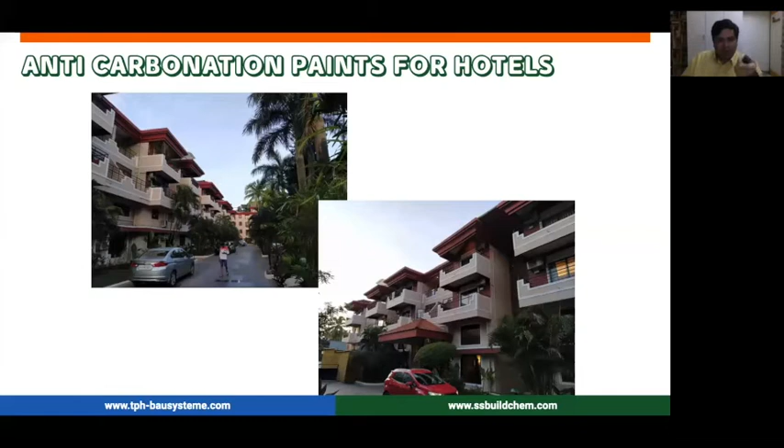This is just a few examples of where we have done it for an entire hotel complex. They were having a lot of problems with waterproofing, and this kind of material solves those waterproofing problems in general. It's for a large resort in Goa.

Again, a lot of buildings have been done with this - houses, factories, especially in industrial zones, inside parking structures. This kind of material has got lots and lots of application just as a protective material inside parking garages, in industrial zones, on any kind of concrete structure.

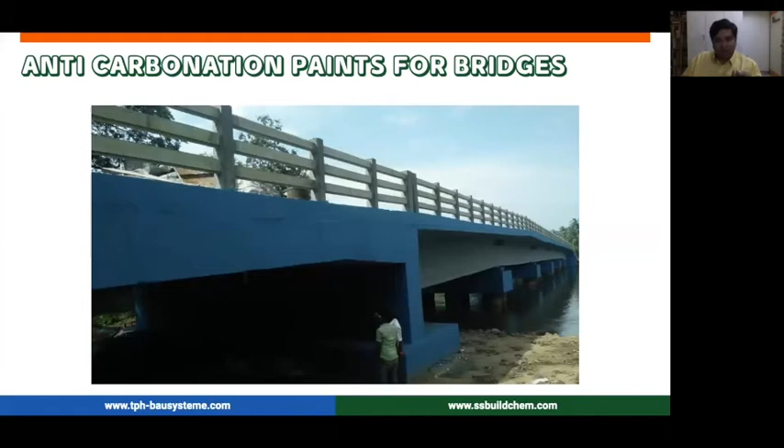The bridge that we have done in Kerala - again, you can see different types of infrastructure, different colors, different kinds of exposure conditions, all taken care of with this.

We have even used this for heritage structures because of its flexibility and breathability, since it allows water vapor transport here and there - you can very easily use it on old masonry structures, where you see a lot of moisture transport. This is a church we have done in Goa, as well as temples.

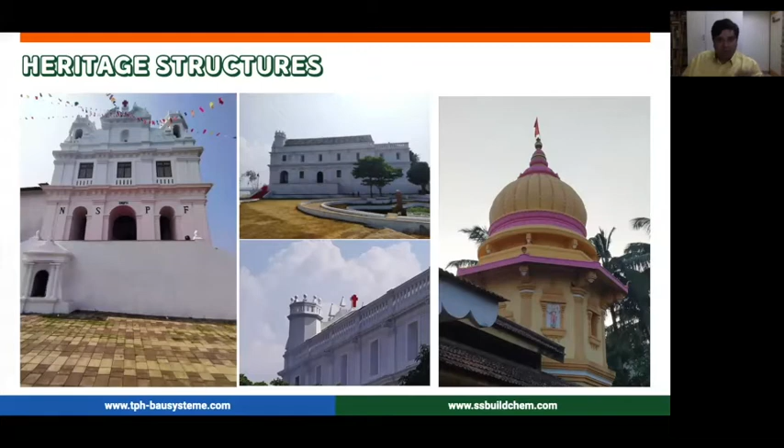So lot of options are there - if you are using the Historep mortar for restoration, we can also use this protective system to protect it in the long run.

When we talk about the concept of protection, we say it is better to leave concrete unprotected rather than protecting it with a non-breathable coating. So you have to select your coating based on the kind of application you're looking for. If it's structures above ground, in most repair strategies, it has to be a good anti-carbonation coating. If you're looking at basements or somewhere inside, you can look at other waterproofing based systems - PU based systems, epoxies, and so on and so forth.

Ask us how we'll do that, because it's the right teamwork of technique, materials, machinery, and manpower that will actually make your repair project a success. So anytime you have a question on repairs or an issue selecting materials, that is what we are there to help you with. In conclusion, protect your concrete and your steel will take care of itself, and using the systems we have, we can pretty much take care of any repair problem across the construction domain.